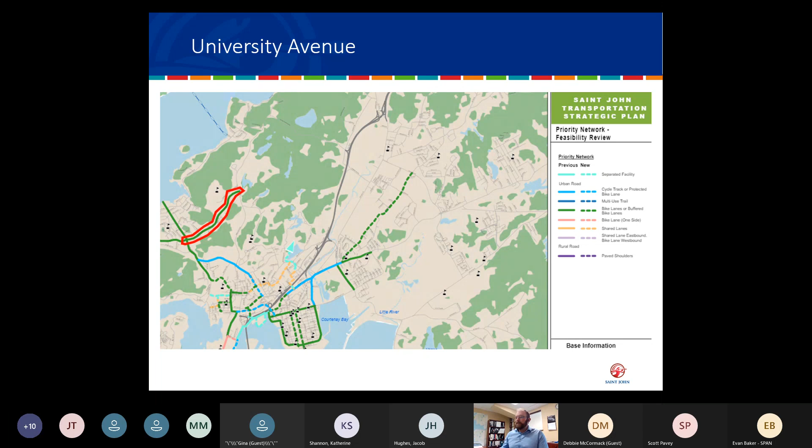This image is from our transportation plan, which we're just finalizing. University Avenue is identified in the plan as a priority cycling route. The green line within the red line on University Avenue indicates a bike lane, or in this case, something called a buffered bike lane. So that's what we're talking about this evening, University Avenue and some opportunities around it.

I want to show, just for context, University Avenue more close up towards the Millidge Avenue end. I'm going to use this image quite a bit this evening to show some of the detailed changes we're suggesting for University Avenue. You'll see this image with different variations throughout a few slides. Millidge Avenue towards the west end is that vertical street to the left, and University Avenue is the horizontal one shown on the screen.

Tim Hortons is just to the upper side and the Wendy's entrance, as you can see. The exit to the Shannex on Bloom Street is just to the north side of University Avenue in this image. To the south, you'll see the entrance to Jean Coutu, the pharmacy, just on the opposite side of the Tim Hortons and Wendy's driveway. So this shows the physical environment of University Avenue.

It does have sidewalks on both sides. The separation between Millidge Avenue and University Avenue has a physical traffic island, which provides a right-hand slip lane from Millidge Avenue onto University Avenue. University Avenue also has center medians down the middle, with gaps for various driveways and entrances, such as the gap here to get into either Tim Hortons or Jean Coutu.

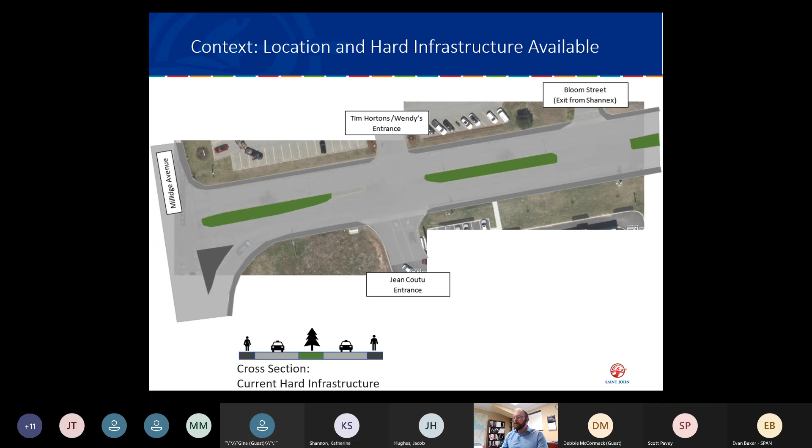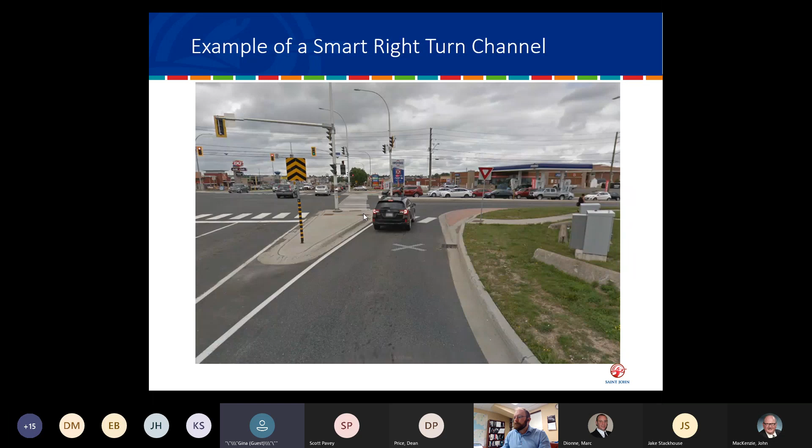I take your point about the truck turning, but if that little thing didn't jut out as far as it does there—I can't remember what you call that little gray thing to the left of the merge, the slip lane—if that wasn't there altogether, there would certainly be an opportunity to make that intersection a little bit wider so trucks can make the turn.

And this is just a question: if you're moving the bus stop, which I think is a fabulous idea, I hope you're going to take out the one at the corner of Candlewood Lane, because basically the bus would just get started and have to stop again. So I'm assuming that one would go.

I did want to point out too that maybe back in 2019 Bloom Street was one-way, exiting only, but it's two-way now because cars go in and out now. That one-way sign has been taken down and cars go in and out of there. So if the city doesn't know that, they may want to look into it, because it's now a two-way street.

What else? I guess that's about it.

I really do have a lot of concerns about what you call a sidewalk. We've seen the upper areas of University Avenue get repaved over and over again, but nothing has ever happened down at this end. I find it surprising that when Jean Coutu was put in—and I'm a huge fan, probably their first customer—the city didn't require proper sidewalk along their property, as they do with other developments. That should have been thought of as part of developing that piece of property, because the sidewalks there are pretty much non-existent. And there's a curve further up University Avenue where I've actually seen cars drive onto the sidewalk, coming down University Avenue, not so much going up. So that's a big concern for me.

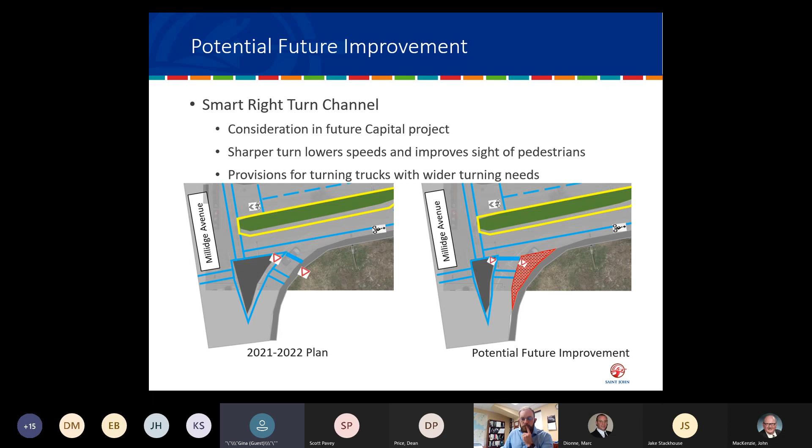The other thing too is traffic flow. You've got 4 apartment buildings, with a possible 5th at the top of Noel, probably up to 200 units up there. Measuring traffic further up University Avenue towards the hospital probably doesn't give a realistic view of how many cars are at the intersection, because a lot of people who live up there—some work at the hospital and turn left, but a lot turn right to go uptown. There's a heck of a lot of cars and units up there, and a lot of traffic coming down Woodhaven, all coming out onto University Avenue right now. I bet if you watch, the majority are turning right, not left. So that traffic count would probably change if you measured it somewhere between Woodhaven and Millidge.

And just finally, I do want to remind you that I represent 64 homes in the townhouse area, where there's a lot of discussion and concern from residents about things on University Avenue. It's very dangerous for us coming out onto University Avenue from the upper end of Candlewood, which is something else we'd like to look at in the future—changing the direction of our road—but that's not for tonight's discussion.

That's for some other time. But thank you for giving me an opportunity to point out the things that I noticed. I really appreciate it, and this is really, really great. Well, thanks a lot, Gina.

I was writing frantically all your great comments there. In terms of the sidewalk condition on that section of University Avenue, we recognize that section needs to be fully reconstructed for a number of reasons. When that street can be reconstructed, the intent is not only to have sidewalks raised above the road, but constructed as proper sidewalks.

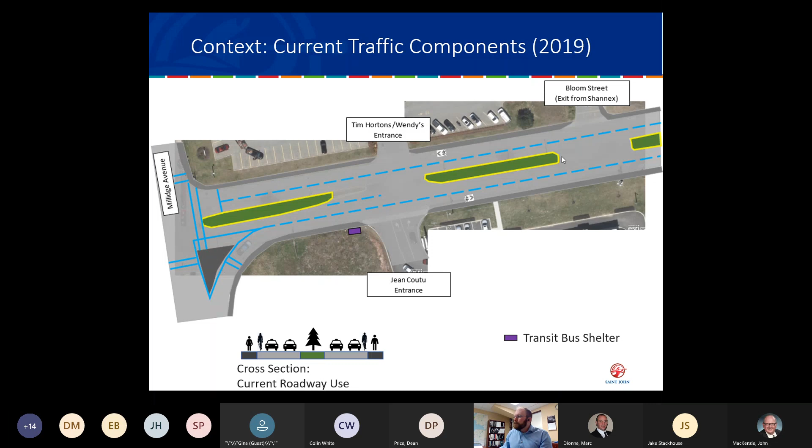I live in the Milledgeville area, and this year I've been biking up to the university. It's my first year, and I do not feel safe at all on my way biking up. The current situation is somewhat of an afterthought, like people just came along and painted a picture of a bike on the ground and said you can ride here now. It didn't really change anything.

As for the current plan, the new plan, I do agree with the lane reduction down to 2 lanes from 4. However, I do not agree with the layout that has been proposed here. One reason I don't like this layout is because the bicycle traffic and car traffic are still very much combined. Painted lines on the street do not make cyclists feel safe. It's not something people would want their kids to ride on.

People would be okay with their kids riding in a car or walking on the sidewalk, except as we just heard, some of them aren't very well maintained down by the Jean Coutu. But an idea I had would be to have all 2 lanes of car traffic on the side of the median by the Jean Coutu. So you'd still get that car traffic, and it would also have a traffic calming effect. When people have cars coming at them beside them, it makes them more cautious.

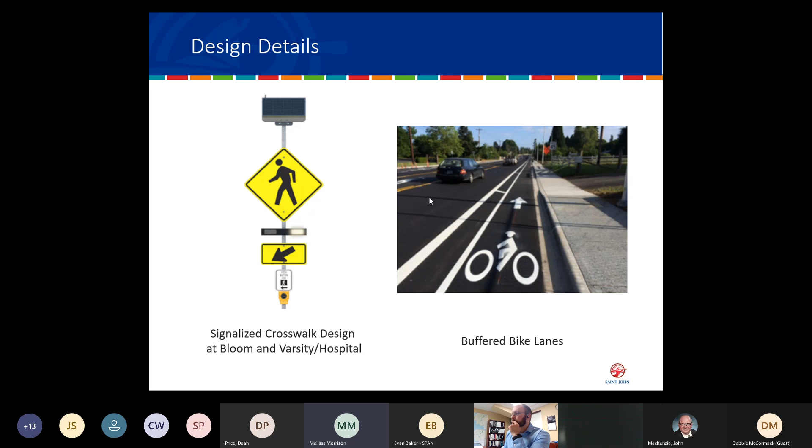Do you have any plans to have a bike box for people turning left to the hospital? That is also an area where, as it is now with the 4 lanes, it's quite dangerous if you're turning left off of University Avenue. So I think having a bike box there, in addition to reducing down to 2 lanes, could be useful.

And then my last comment is around the Millidge Avenue intersection itself, just around the programming of the lights for pedestrians as it is now. I don't know if that's something you're planning on addressing in the future, but as it is now, the way the lights are programmed, both directions of pedestrians have to cross all at once, and if that could be fixed. Yeah, that's all I have. So thank you very much.

No, great suggestions there, Melissa. We never thought about that bike box idea down at the hospital, but certainly there'd be a lot of cyclists going up towards the hospital or university making that left-hand turn, and the space is there because of the break in the median. So we'll make note of that opportunity.

In terms of the lights at University and Millidge, it's an interesting debate. It's not quite a scramble walk like we have at Yonge and Dundas in Toronto, but it's a pedestrian phase where the lights are red in all directions to allow pedestrians to cross on all four legs of that intersection. It's an interesting debate in the community because you create that red light for all directions, which also prevents the left-hand turning issue.

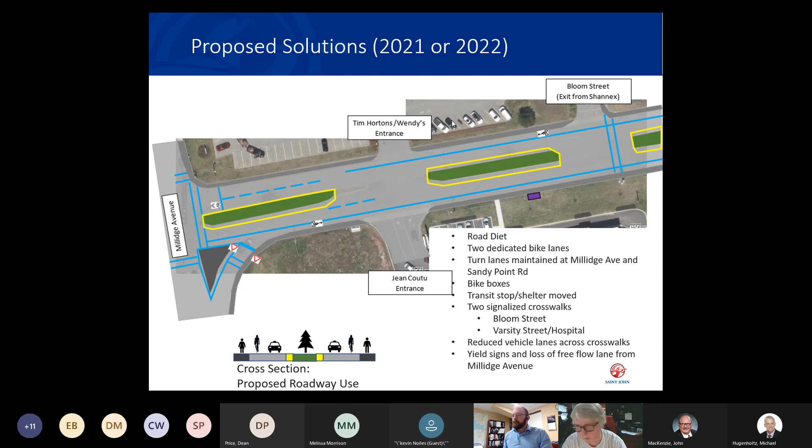And with the survey that was done in 2012, that's a little bit out of date, as multiple people have already pointed out, because of the buildings on Woodhaven. There's also a lot of buildings, or potential for development, on the south side of University Avenue that will increase the traffic on University Avenue.

So my concerns are taking it down to two lanes. Besides the 2,000 employees, there's patients going there, there's tests to be done, clinic appointments, seeing doctors, visits to ER. It's an ambulance route, it's also a bus route. And there are bottlenecks that occur now, and some of those have been pointed out.

So my concern is looking around those bottlenecks and being careful, especially if you're going to put more crosswalks in, and during the change of shift you're going to get more bottlenecks and potential problems. I'll tell you, I was on University Avenue today, and there was an accident that blocked two lanes completely for a length of time, and it didn't occur in the first 200 meters. It was right at the entrance of leaving the hospital entrance on University Avenue. So it was a little annoying to have to stand in line to get out, but that is what it is.